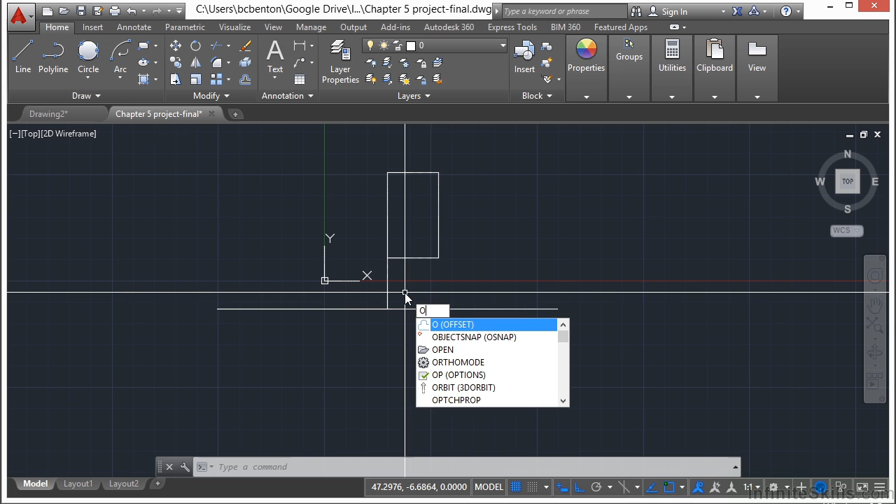I'm going to throw in another command we haven't used yet called the offset command. I'm doing this because it's just so much easier to use the right commands. We'll go into details on these much later on. So type in O for offset, press enter, type in 30 for 30 units, press return again, select this line, move your mouse down below it, left click and press enter.

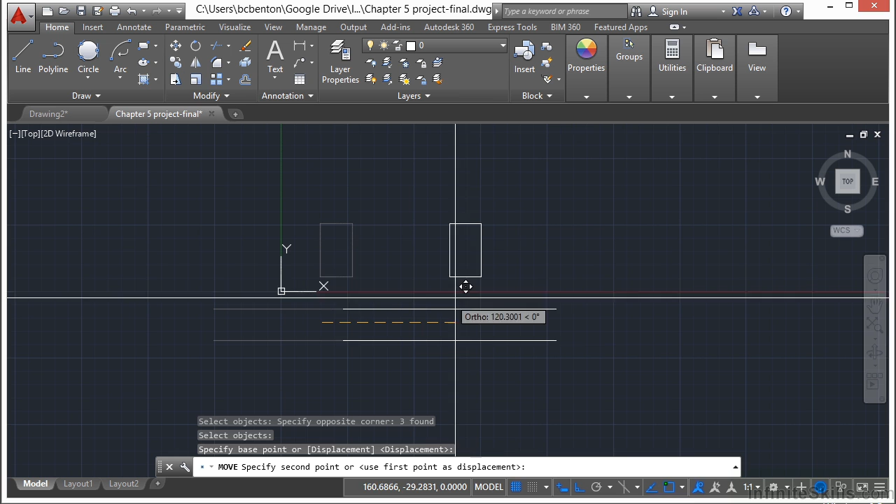So now we have a house and our road. Select this line and erase it. I'm going to move these just kind of out of the way so that our UCS icon is not in our way. Okay, so now we have our house and our road, so we kind of have an idea of what's going on. This is the front of the house, this is the rear, and then our sides.

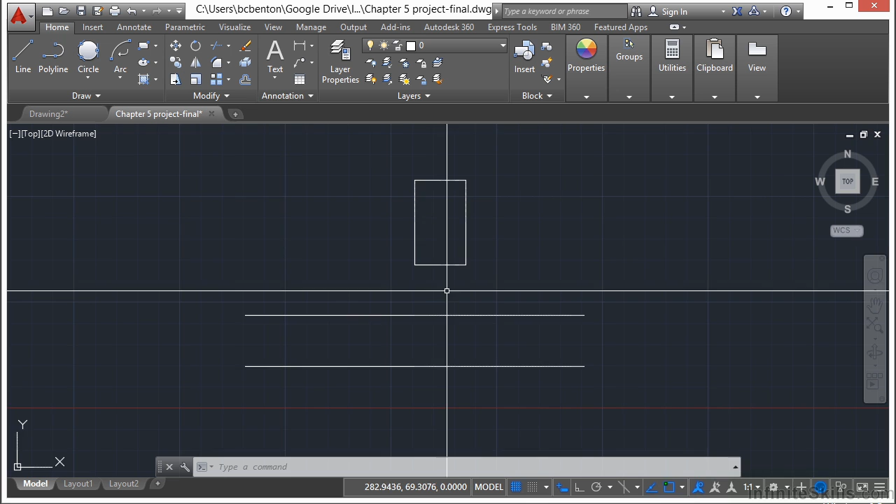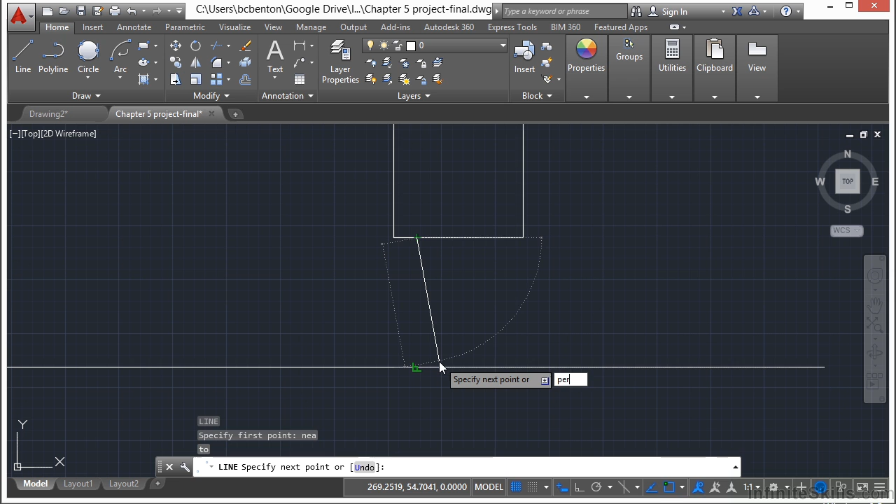Now we need to draw a driveway. We're going to make two parallel lines, about 20 units apart from the house to the road. Type L for line, and then type in NEA for near O-snap. Press enter, kind of zoom in, and just find anywhere on here, it doesn't really matter. Left click, and then draw a line down here. Use the perpendicular O-snap. You can type in PER to override that.

Press enter, and now that line is drawn. Now I want to make this 20 feet wide, so I'm going to use that offset command again. Type in the letter O, press enter, and type in 20 for 20, and select the line, and then move to the right of it, and then click again, and then enter. Now we have another line that's 20 units wide. This is our driveway. It's a very skinny house, but you get the idea.

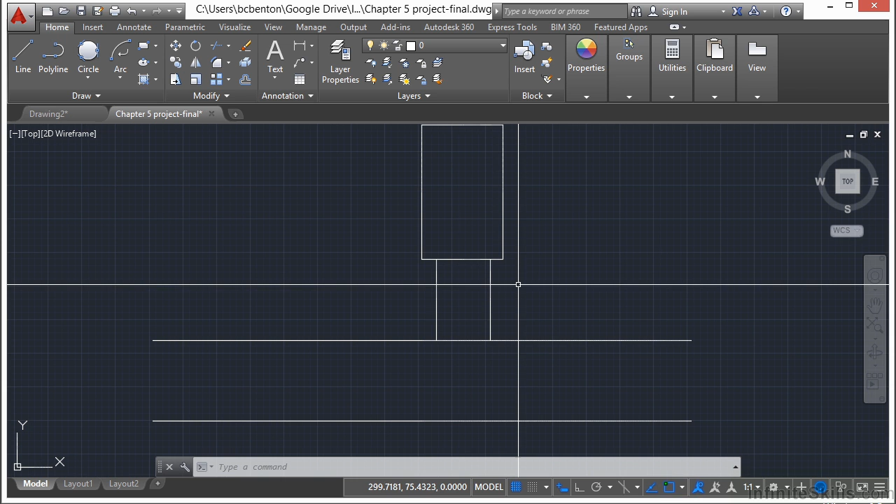Now I want to make a doorway. Let's put the door on the side over here, so it's a side door. Start the line command, press return, and again type in NEA for near, press return, and zoom in. Just anywhere down here is fine. Now I'm going to draw a line.

I'm going to make this line, because it's a door, I'm going to make it 3 units long, type in the letter 3, and then press tab. Now this tells AutoCAD that I'm drawing at an angle, so I'm going to draw it at 60 degrees.

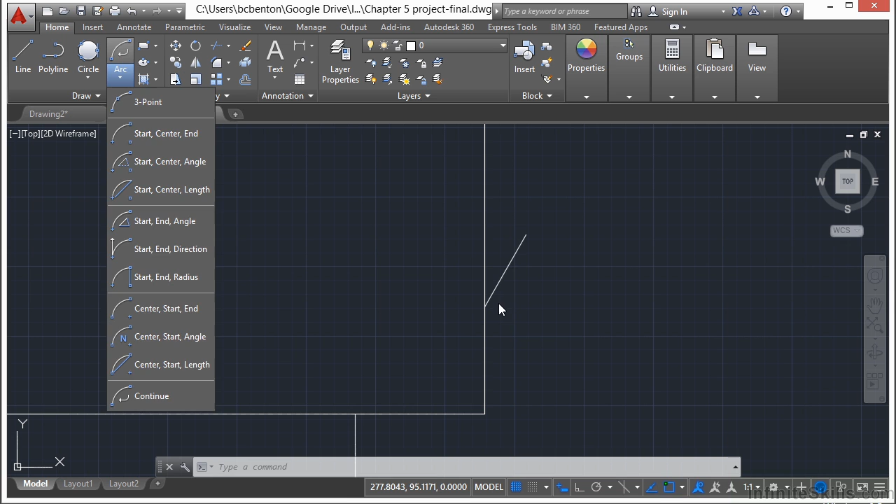Press return, return again. Now I have a line that's going to be a door. Oftentimes in architectural drawings, when a door is shown open, you put a little arc in there. So let's draw our arc. I have my start point here, and it's going to end over here somewhere. I don't know exactly where, but I know that angle is 30 degrees, and I know this is going to be my center point.

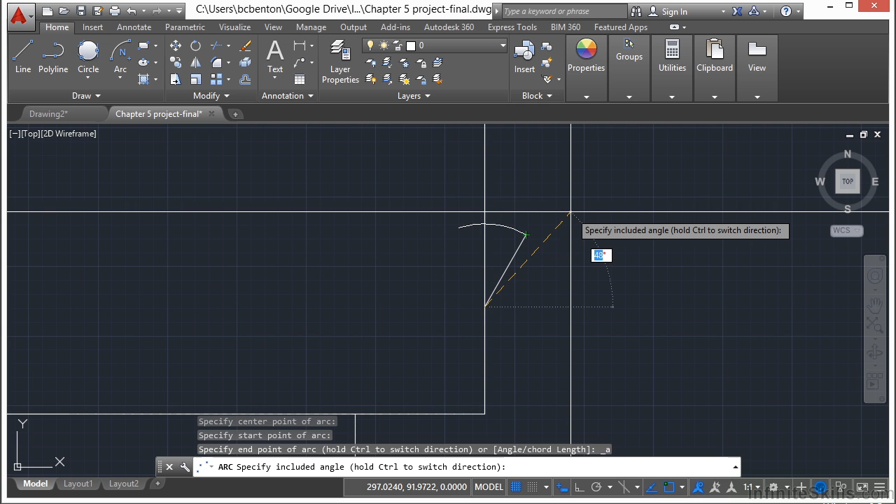So I can go with center, start, and angle. I select that object. There's my center point, there's my start point, and now my angle - type in 30 for 30 degrees. And there we go, so there's my little door.

Now I've done some work already, and I don't want to lose this, so I'm going to save it. I click the Save button, or press Control and S at the same time. So now I've saved my work, and I'm not going to lose any of it.

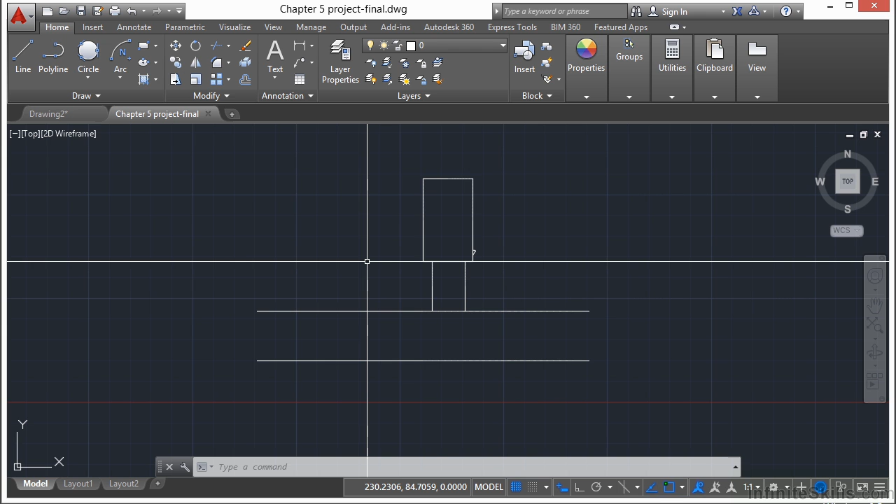Now I want to draw a sidewalk, so I'm going to draw a polyline, make it parallel, about 5 units apart. Let's start our polyline command, coming from this door. I'll left click here, have it come out straight a little bit, and then curve around into my driveway. Let's turn on ortho and draw it out a few units - it doesn't really matter how far.

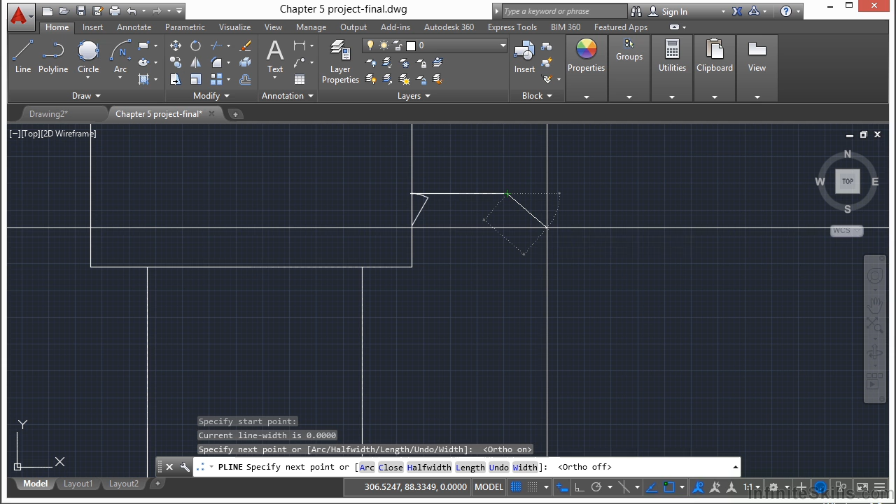I'm going to turn off ortho now and start drawing arcs. Type in the letter A for arc, press enter, and make a slightly meandering little sidewalk here with some slight arcs, but then it levels off to a straight line, and I'll make this perpendicular to my driveway. Press return - there's the start of my sidewalk, and I'm going to offset this again.

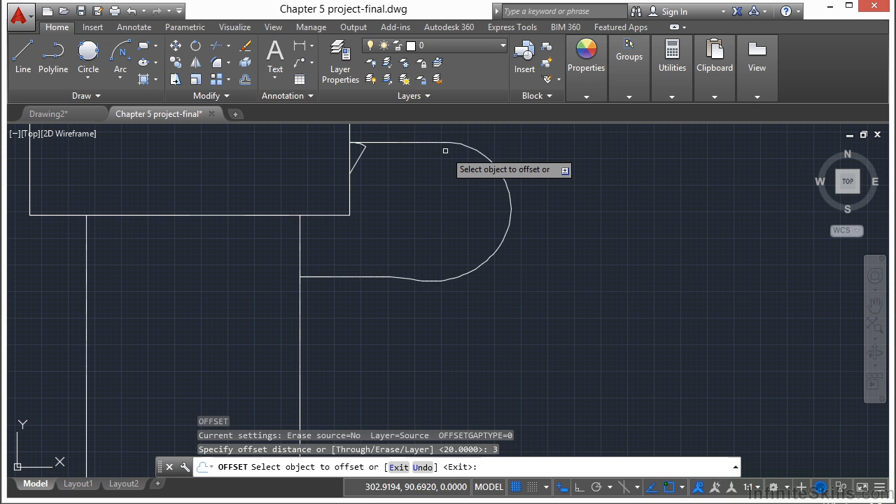Type in the letter O, this time type in 3, press return, select the line, go to the inside, left click, then press enter. So there's a nice little sidewalk.

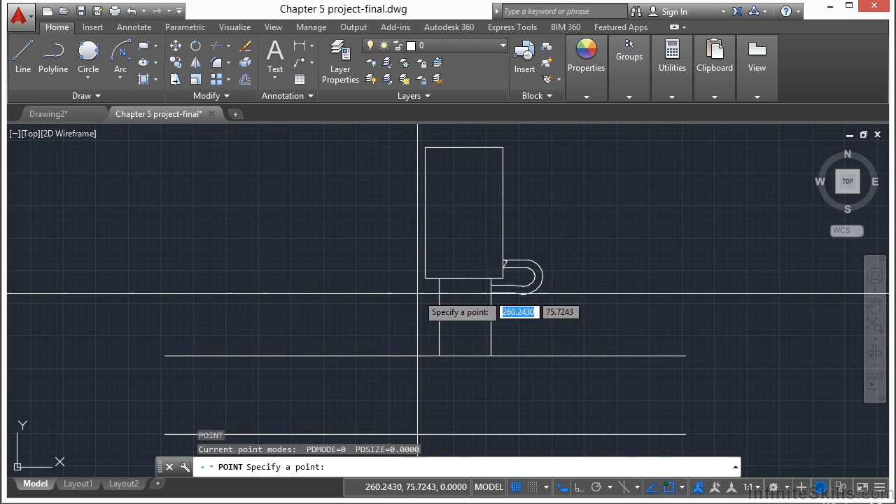Now I need to create a planting area, and what I'm going to do is connect the dots, so I'm going to make some points. Type in PO and then enter, and that planting area is going to be over here somewhere. Remember, if you right click, it acts as the enter command, giving you your last run command. Now those are there, and I'm going to type in DDPTYPE.

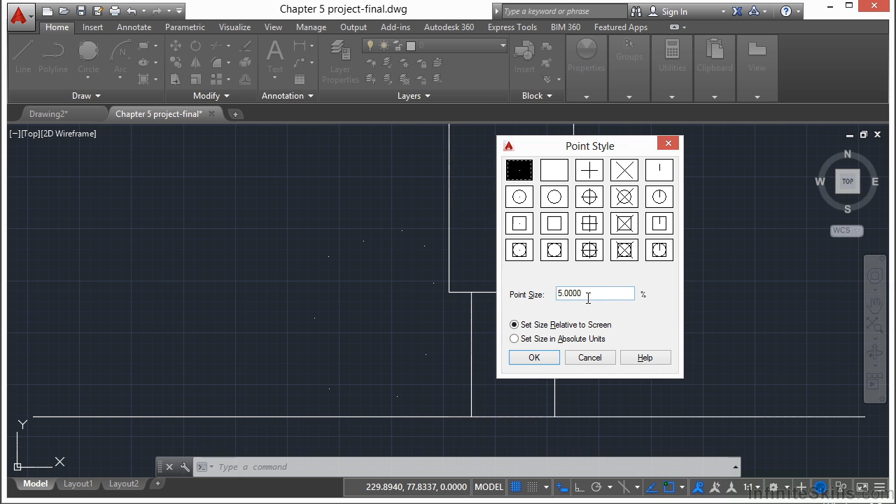Let's set these up a little bit. Let's make the point size relative to the screen, keep it at 5%, and let's make little X marks. Click OK, and there they go.

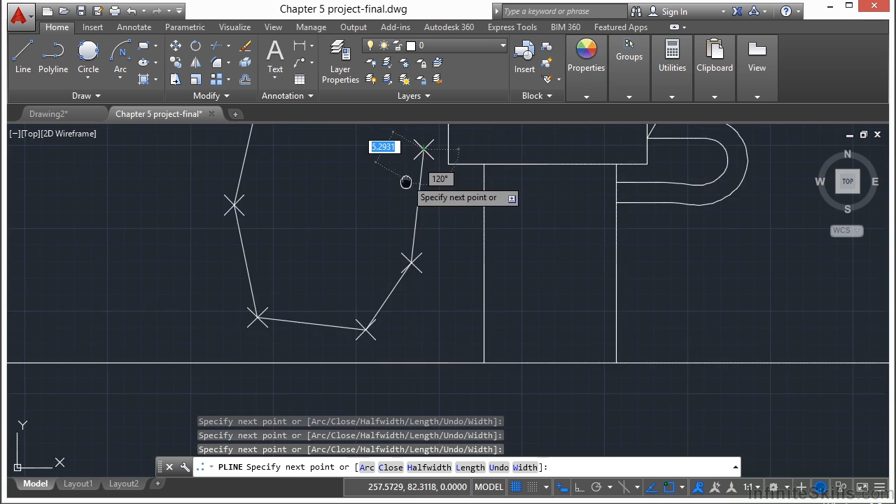Now I'm going to use my polyline command and connect the dots. With your running OSNAPs on, you can see this becomes very easy. Make sure you use the node OSNAP. Then when I'm done, I can just type in CL to close it.

Now let's draw some circles just randomly in here, and I just need a center and radius. Varying sizes, varying amounts. Maybe these will represent what some plants are going to be.

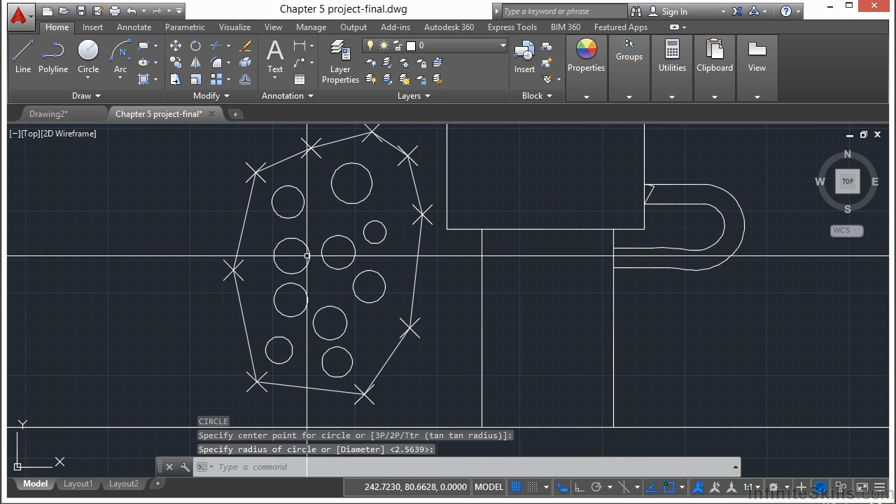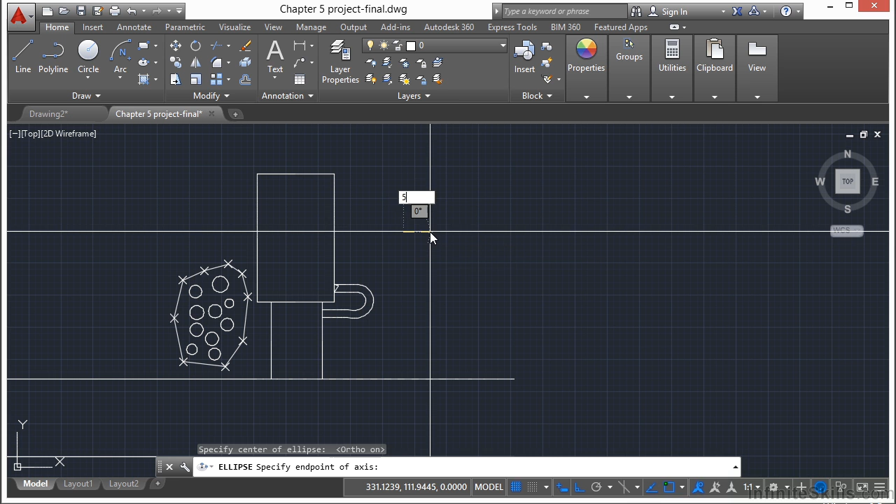Now over here on the side, I'm going to draw a nice little ellipse for a little pool or fountain type area. So let's go to our regular center point. I'm going to turn on ortho again - just press F8 or click on the icon down here in the bottom. Select a point, and I'm going to make it 5 units wide and then 10 units tall.

Now I want to make a pathway or some stones around it just to pretty up the fountain. So I'm going to use my polygon command - come up here for polygon, and I'm going to give it 6 sides. I'm going to pick a point here, inscribe it, and make them about 1 unit in size, so they're about 2 or so units wide.

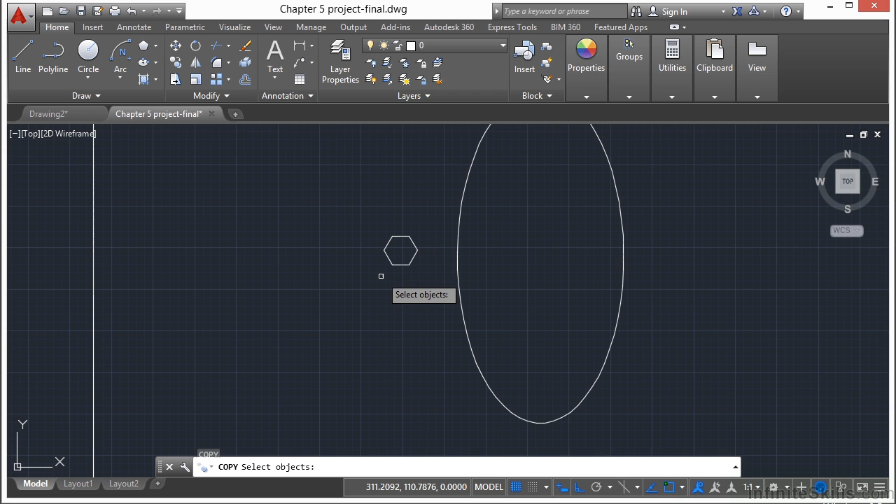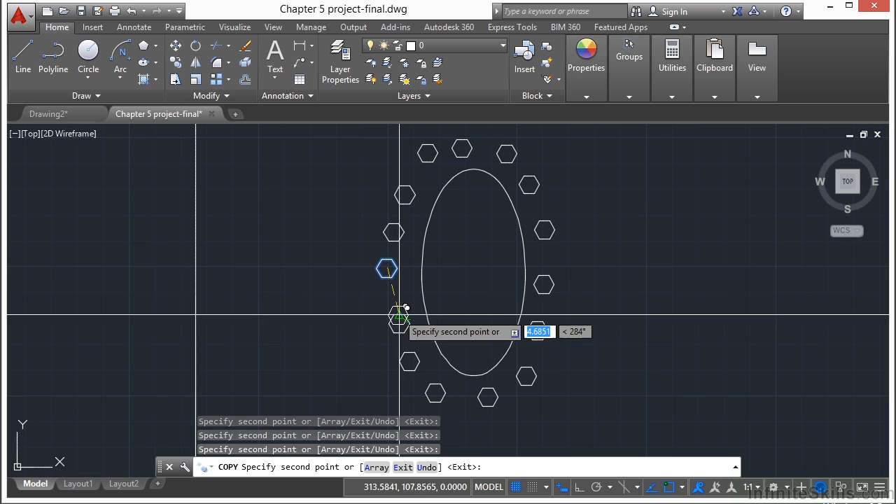Now I'm going to copy these with the copy command. Type in CO, press enter, select that, press enter again. Just pick a point somewhere towards the middle, turn off my ortho, and I'm just going to randomly put them around my pool. You just left click at the spot where you want it to go. When you're finished, press return or double click on your mouse.

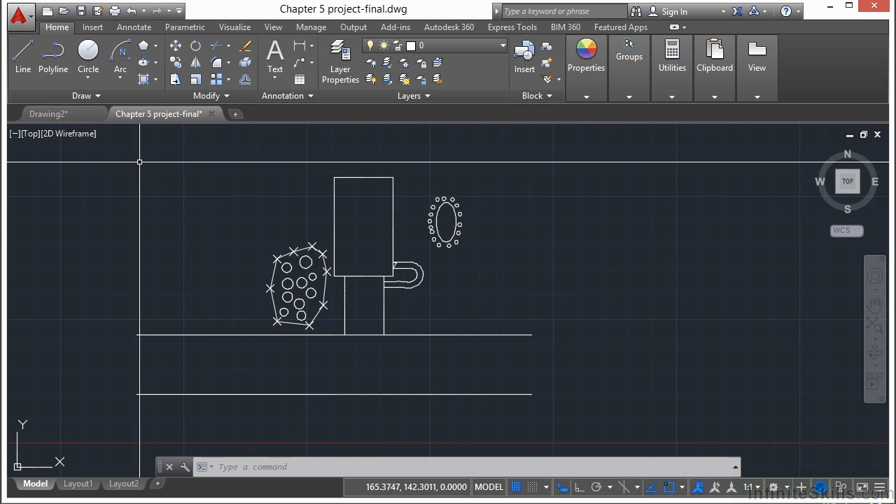And we have the start of a landscaping plan for our house. Make sure to save your work so that you don't lose it. Now yours might be a little bit different because I did some things that were just kind of random, and that's perfectly fine. This is just a demonstration very quickly of how to draw with several different tools in a very simple way.